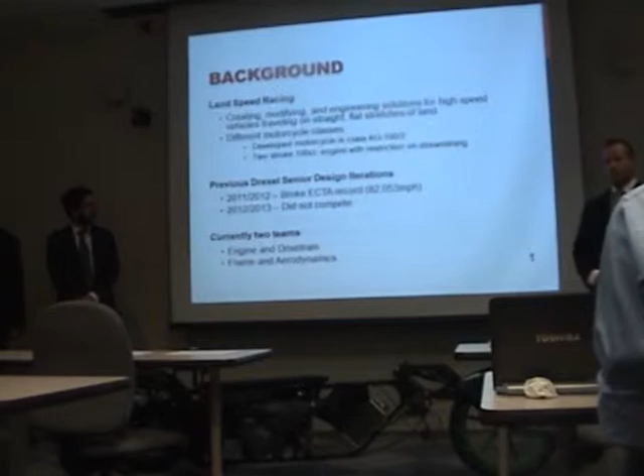A little bit of background about our project: it started two years ago by our advisor, Ryan Miller. He was trying to set the world record of 99 miles an hour. He went to ECTA in Ohio and broke the record there at 82 miles an hour. Last year they tried again but didn't get to race, so they couldn't try to break that.

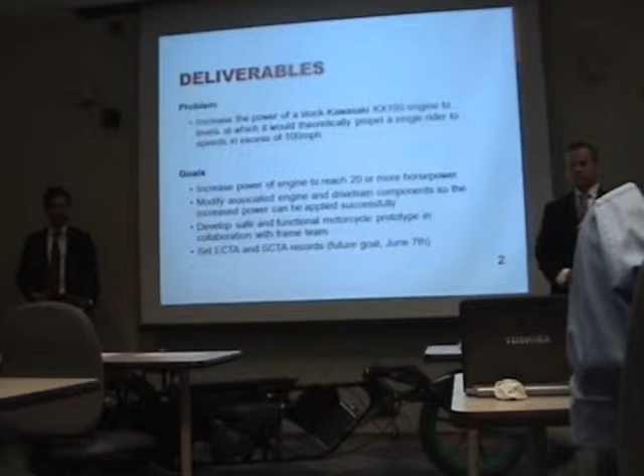Currently there are two teams, the engine team, us, and the frame team back there, working on this bike. The problem is we would like to develop the engine so it could theoretically propel a rider to 100 miles an hour, not necessarily beat the record, just make the engine capable of doing so.

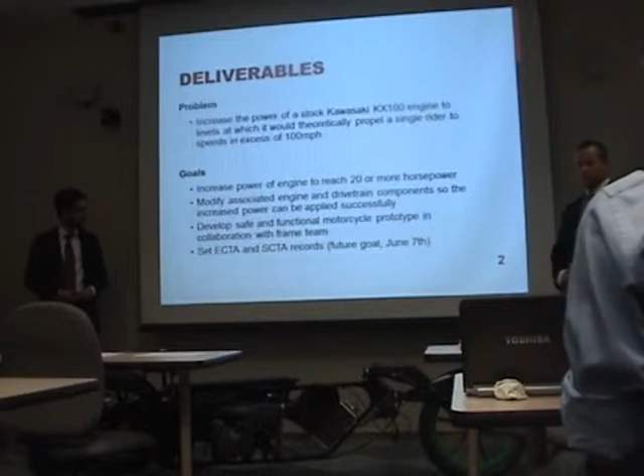We have some goals. First, try to reach 20 horsepower or more. Second, work with the frame team to develop this prototype to be functional and safe. And last, we want to try to set the record. That'll be in a month from now, I think.

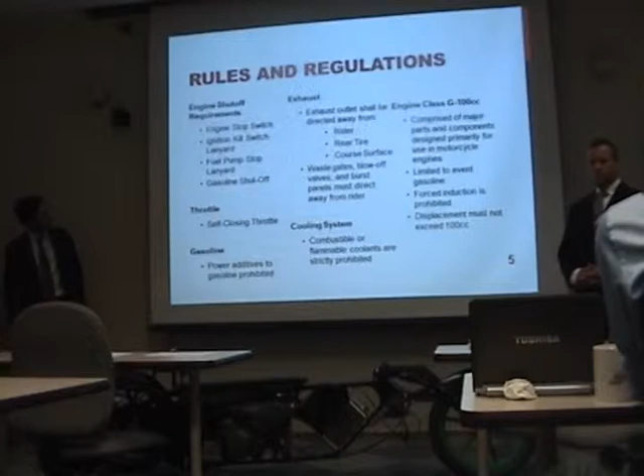These are the rules and regulations set out by SCTA and ECTA. We follow these while developing the bike to make sure Chris is safe as he's flying down the road. We've met all of these regulations, so we should be good to go when the time comes.

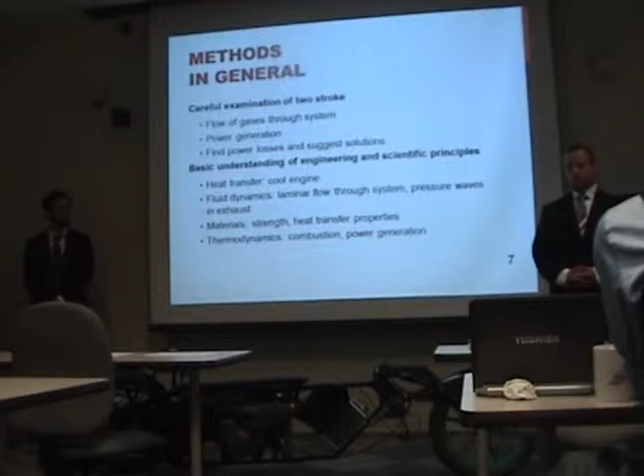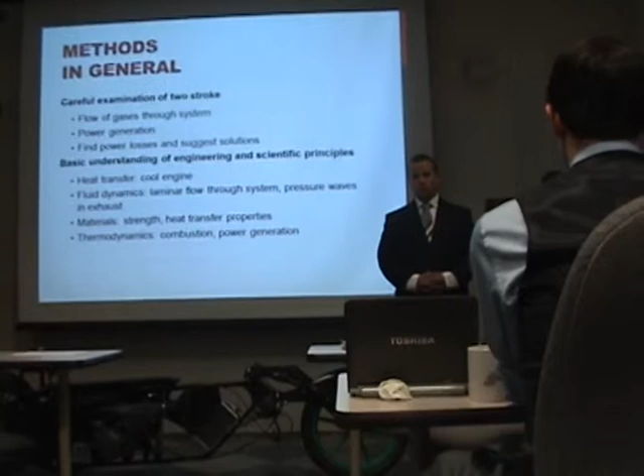The methods we needed to go over involved studying the flow of gases through our system, figuring out how to generate more power, and identifying where power was being lost. We used a basic understanding of our engineering classes at school, such as heat transfer, fluid dynamics, material strengths, and thermodynamics, to figure out these issues.

We began our project with a method of reverse engineering. We looked back at the past two years' teams to see what they had done with the actual engine.

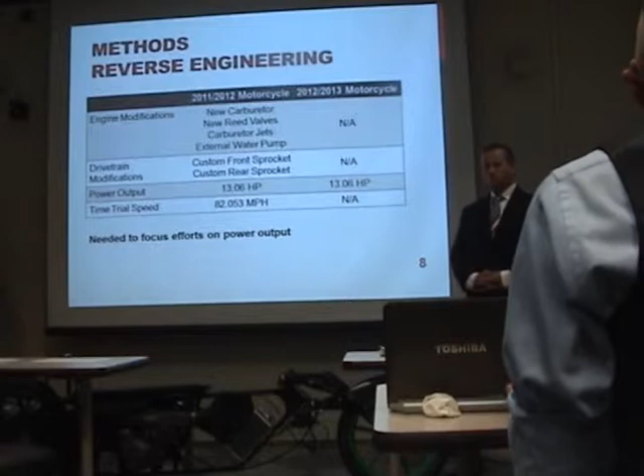The starting engine we received only had about 13.06 horsepower, and the only bike able to compete only achieved 82 miles an hour. Basically, the wind resistance overtook the power the engine was able to produce.

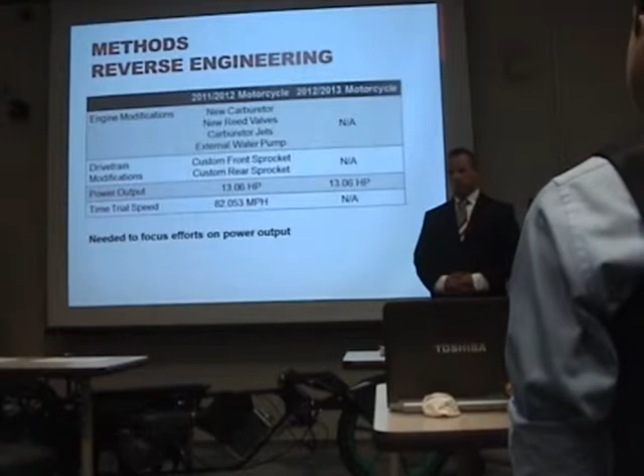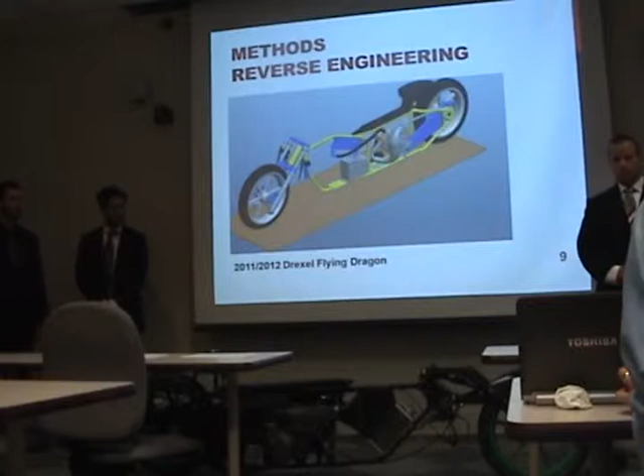We also looked at the designs of the frames from past years to see where the engine placement was, and whether the engine mounts were strong enough to hold the engine in place. We noticed that with the second year's bike, the engine wobbled around a lot, so a lot of power was lost and not transferred to the wheels.

So we had to work very closely with the frame team to create a good design for the engine to be securely mounted in the proper location.

Once we figured out a good frame design, we did a CFD analysis and determined we needed to achieve a minimum of 12 horsepower on concrete and 15.77 horsepower on the salt flats, due to the difference in rolling resistance between the two surfaces.

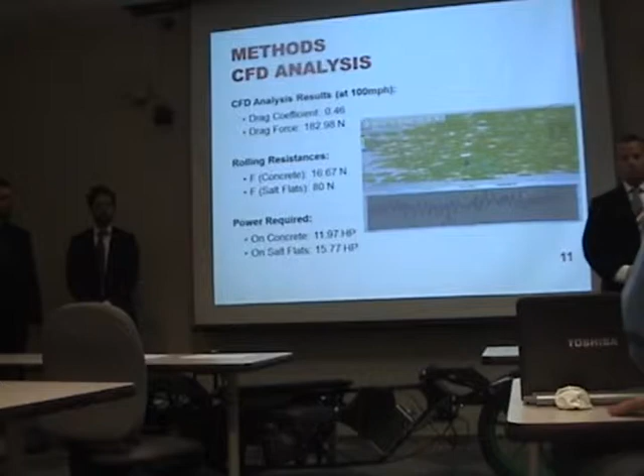Give me one second and I'll play a video for you of our final dyno run. Leave it going.

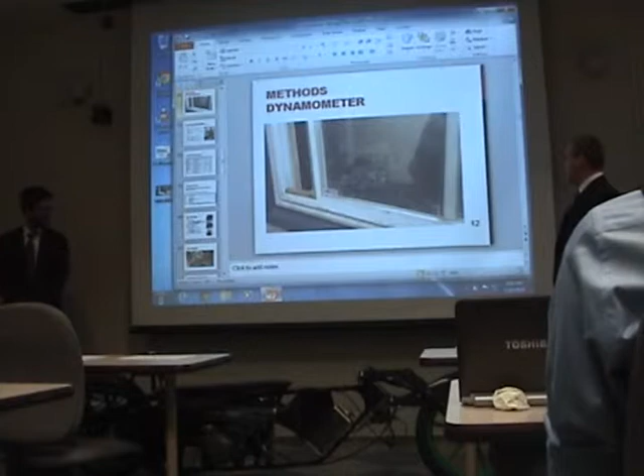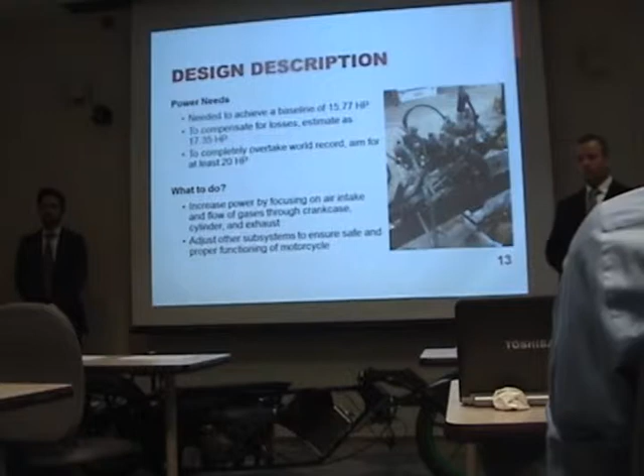Okay, so as we said earlier, we set our power goals. We need at least 15.77 horsepower. We factor in a safety margin of 10% to account for any losses we couldn't otherwise account for, so we need 17.35 horsepower to match the record. But we don't just want to match it, we want to beat it, so we're aiming for 20 horsepower.

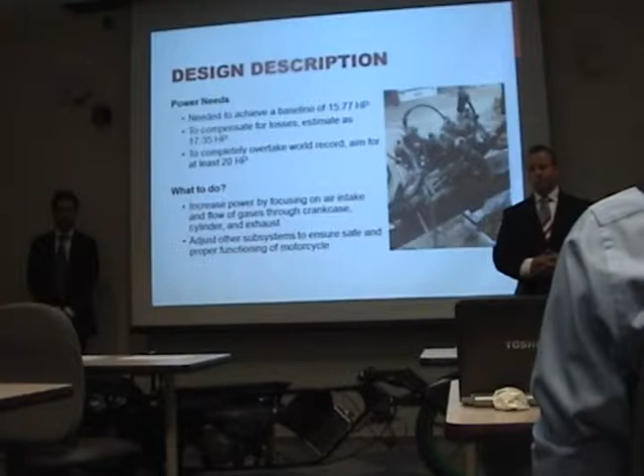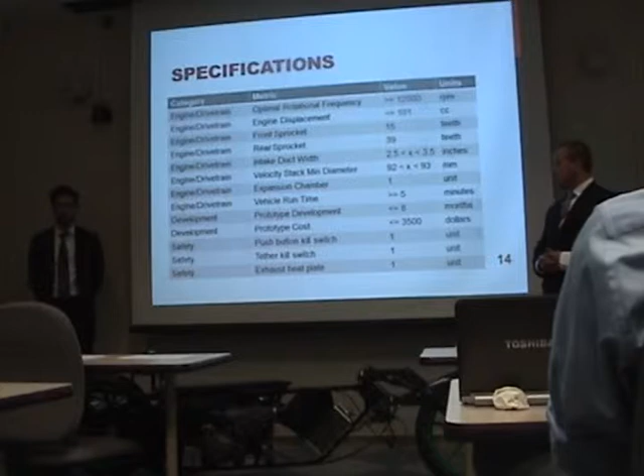Essentially, all we do to achieve that is increase the airflow of the engine. These are some of the specifications of the engine: we're aiming for 12,000 RPM, where our peak power is, and this shows our sprocket sizes. Anthony will go into detail later about how we calculated what's ideal for these situations.

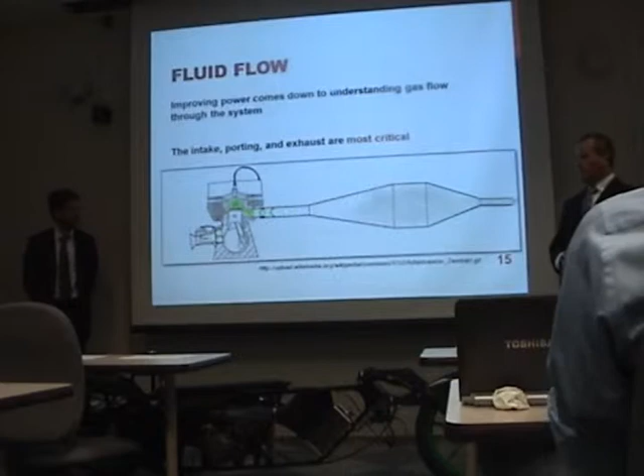Essentially, an engine is an air pump. The more air you can move in and out of the engine, the more fuel you can burn, hence the more power you can make. I'll also go into this diagram in more depth later.

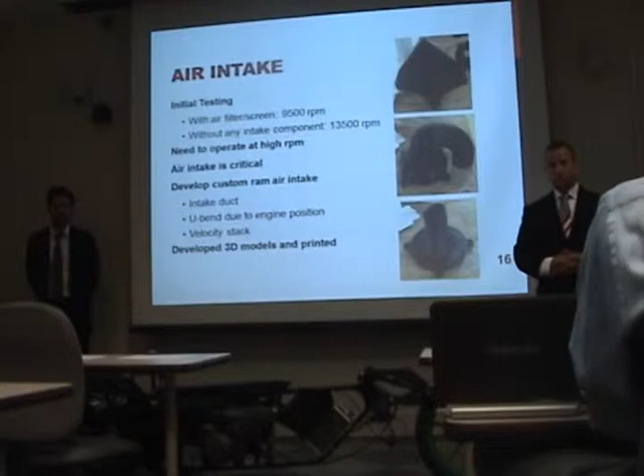So the beginning of the system is the air intake. Since we were in a class where we couldn't use forced induction by use of a turbo or supercharger, I decided to design a ram air induction system for the motorcycle, which basically takes the air as you're driving. The faster you drive, the more air that flows right into the intake.

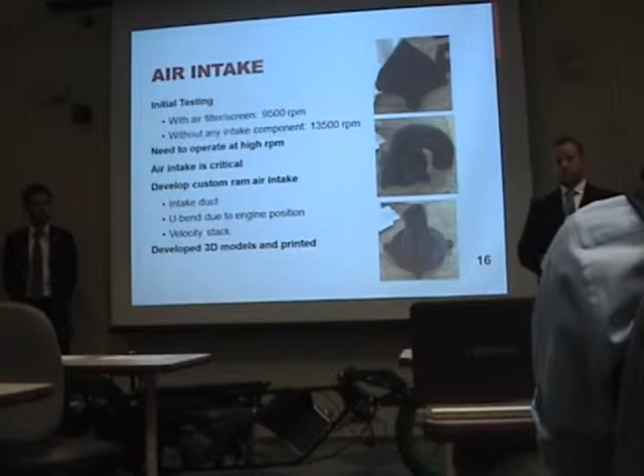But the only issue with this is you need to make sure that the air doesn't reach any type of sonic speeds within the system, because then it could cause a bottleneck and stop the engine and starve it. Also, you've got to make sure there's not too much restriction, because earlier the bike wouldn't rev past 9,500 RPMs because there was just a screen on it and it was too restrictive for the bike to rev out. So we needed to make sure this intake was streamlined, got all the flow that we needed, and made sure there was no restrictions.

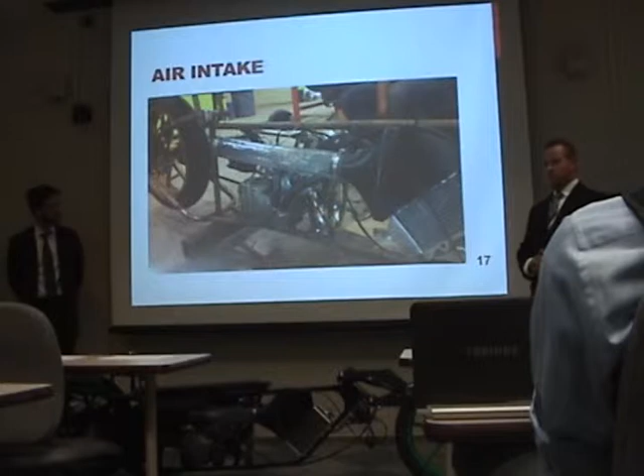Here's a picture of the intake on the screen, and you can actually see it right in front of you as well. It was created with 3D printed parts, and we did our proper heat shielding that we needed to make sure it didn't melt or cause any type of damage to the motorcycle.

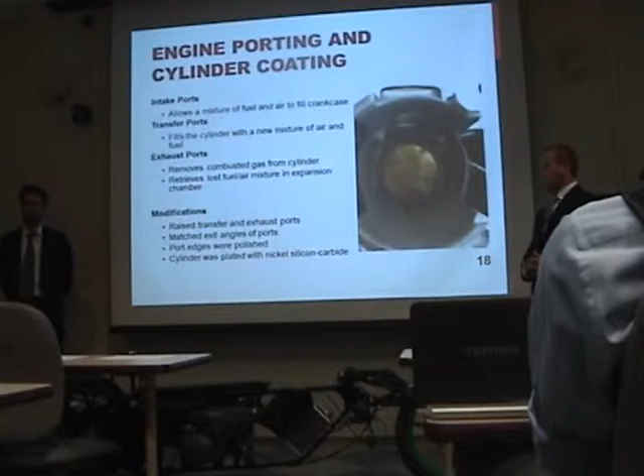Okay, so this is a picture down the bore of our cylinder, and what makes this different than your conventional four-stroke engine is that there are no valves. So as the piston moves up and down the cylinder, it uncovers and covers certain ports. By changing the shape and location of these ports, we can maximize our airflow and essentially change our engine timing.

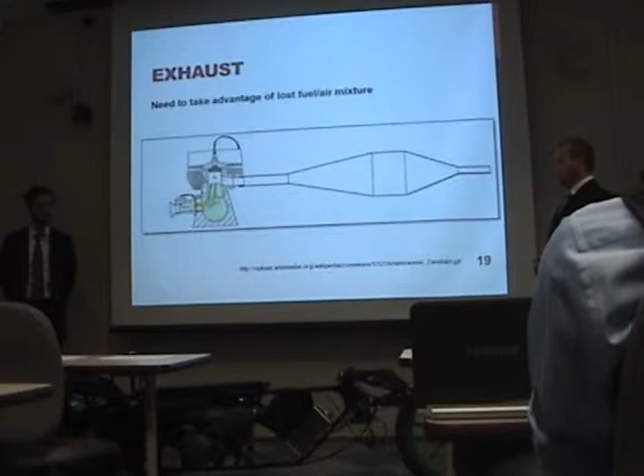This diagram is very important to the function of the two-stroke engine. It uses a tuned exhaust chamber, and the inherent flaw of the two-stroke engine is that you lose fresh intake gases out the exhaust while the piston is at bottom dead center. So to combat this, you use a tuned pipe, which actually reflects a sound wave back, which keeps that charge in the cylinder so it's ready to burn.

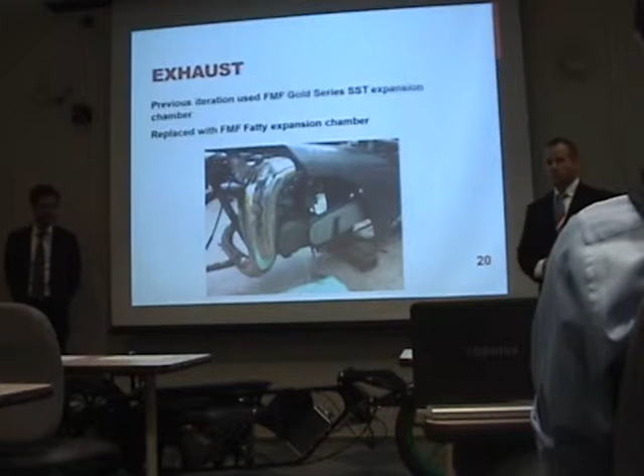This is the expansion chamber we ended up going with. We had another one from FMF, but what they do is change the size and shape of it to tune it for a specific RPM. And the fatty one was much better for our needs.

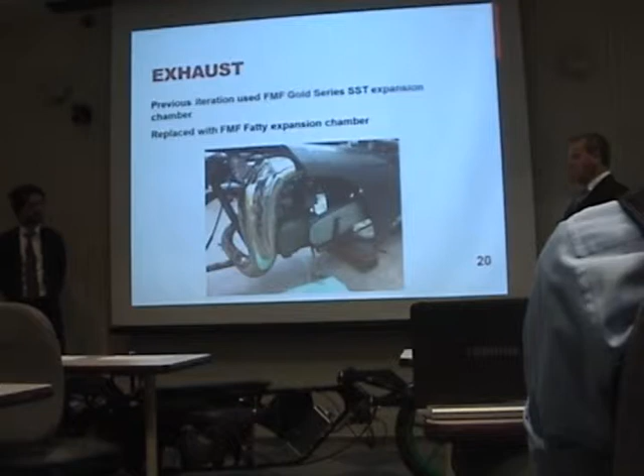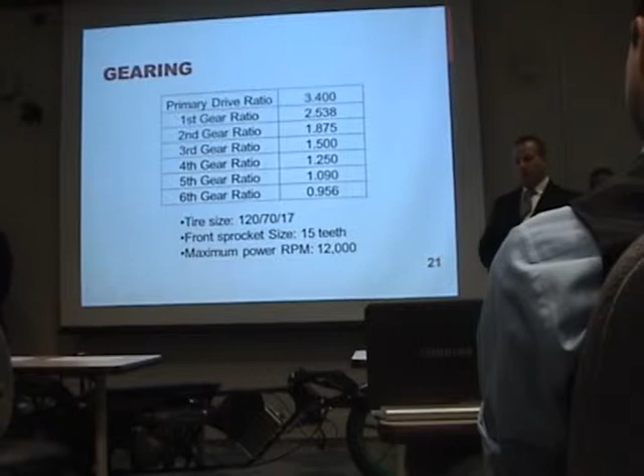So for the gearing, the first step was to take a look at the transmission and figure out exactly what type of ratio each gear had. Then our approach was to take a look at the sprockets, the rear sprocket and the front sprocket, and figure out how many teeth we would need in order to hit our target speed at our maximum power RPM, which is 12,000 RPM.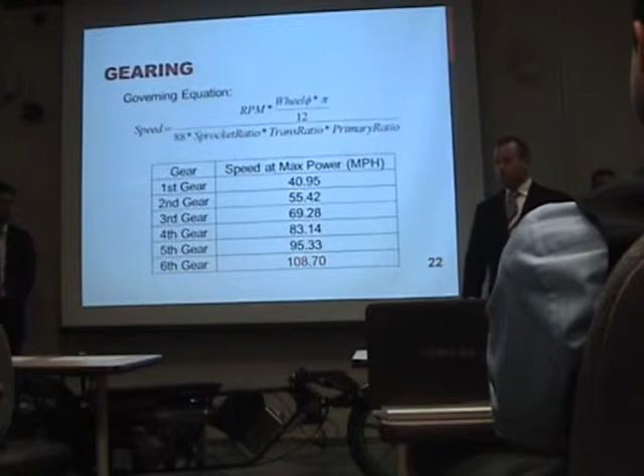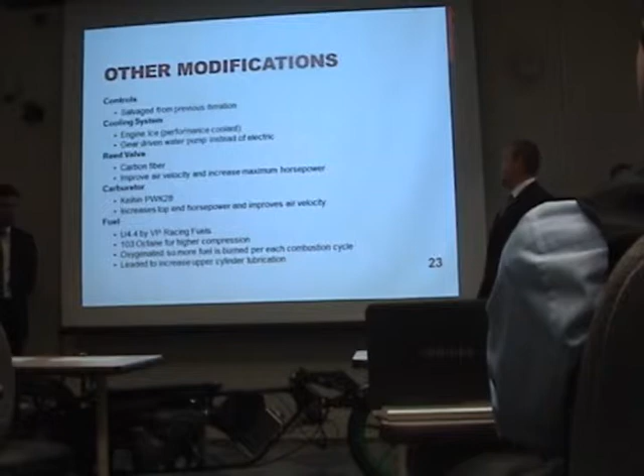So some other modifications we made: we were able to salvage our controls from one of the previous motorcycles, which was nice, so we didn't have to buy extra parts we didn't need. For the cooling system, we decided to go with Engine Ice. It's a very good coolant, widely used in two-strokes. Also, we decided to go with the gear-driven water pump instead of electric. It's just way more efficient.

Secondly, our reed valve - we went with carbon fiber, improved the air velocity, and it increased our maximum horsepower overall.

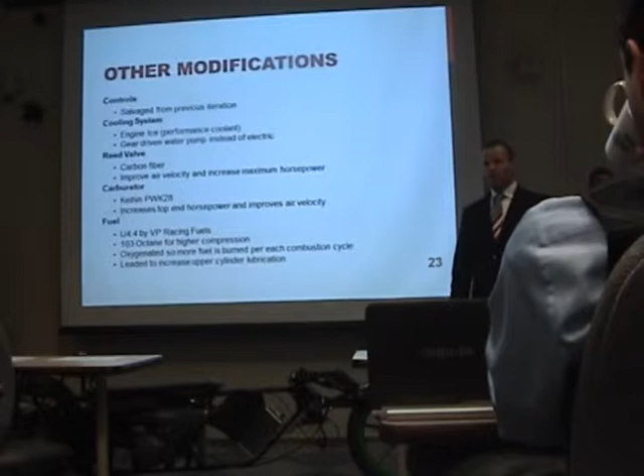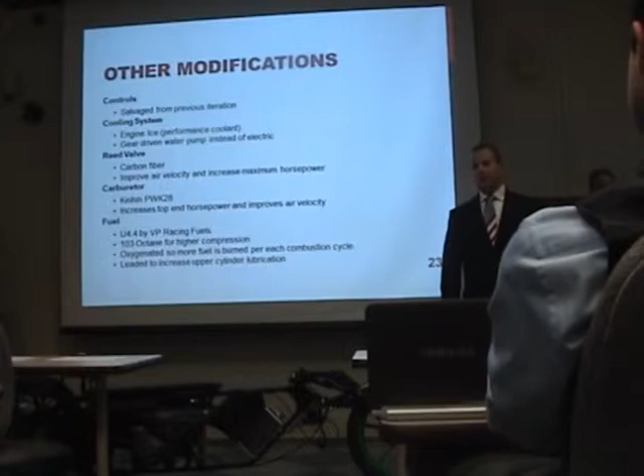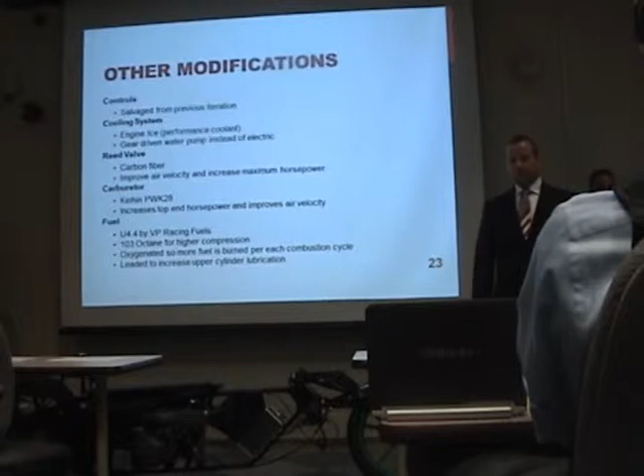Next, our carburetor - we decided to go with the PWK 28. The reason for this is it's a D-shaped carburetor, and what that means is there are basically three main different shapes: a D shape, a rectangular shape, and circular. The D shape is kind of like the best of both circular and rectangular, where we're going to be able to achieve maximum RPM power, regulate the fuel, as well as have enough torque down the low end to be able to propel us forward. So we decided it was just the best of all the options.

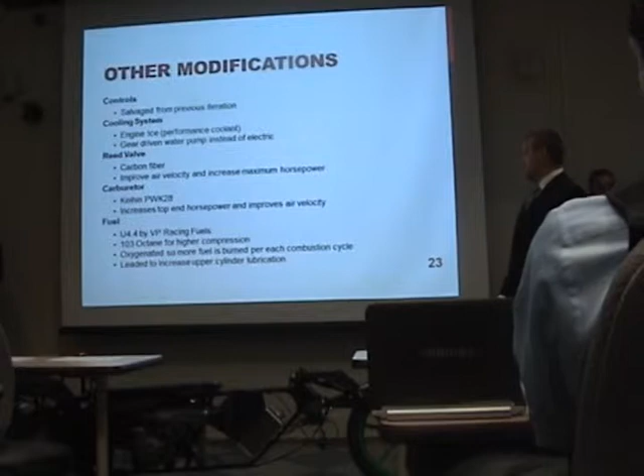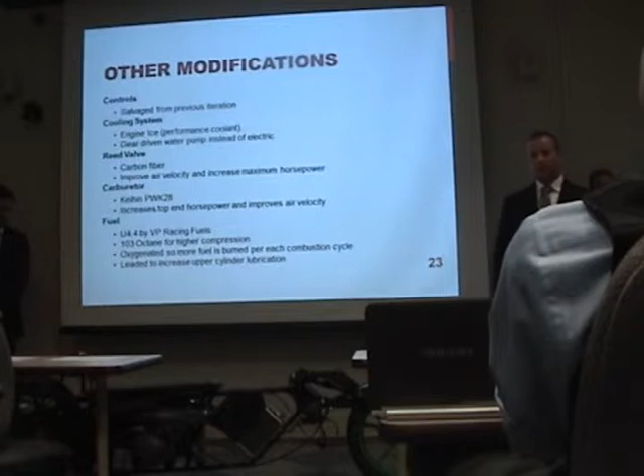Next is the fuel. Per our regulations given by ECTA and SCTA, we'll be using U4.4 racing fuel by VP Racing. This is 103 octane leaded fuel. It's pretty much the highest octane that we're allowed to run per regulations, and it's so far achieved our maximum power out of the different fuels we tested.

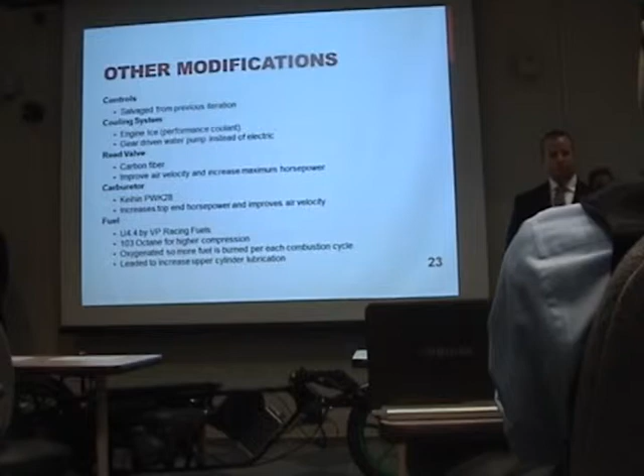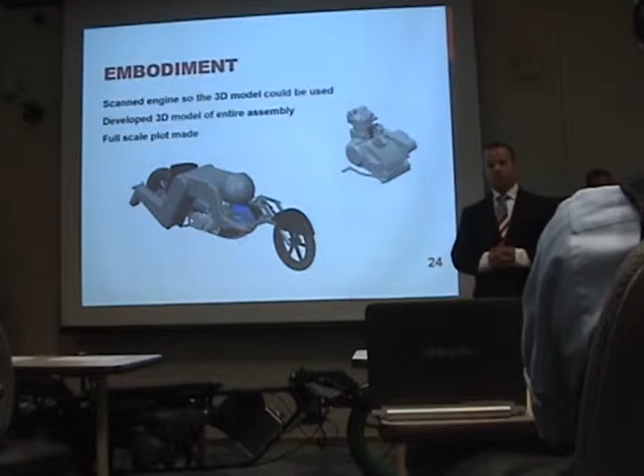For the embodiment, we did a lot of 3D modeling to collaborate with the other team, mainly using SolidWorks. Once we had our frame designed, we took the motor and utilized the 3D scanner down in the UG lab. We took a scan of it, placed it into the frame to make sure everything fit, so that when we started routing our exhaust, intake, and everything else, we knew there wouldn't be any issues when it came to putting everything together.

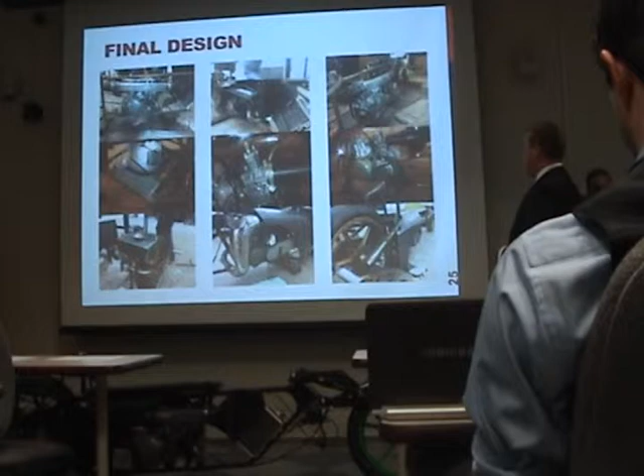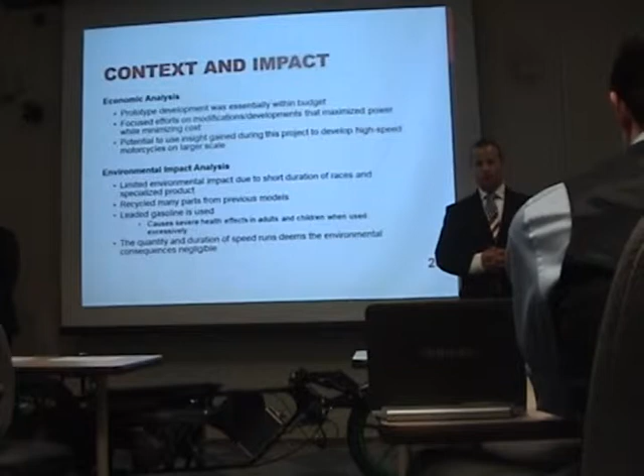For our context and impact, first is economic. We developed a prototype within our budget. Luckily, we didn't spend too much money on our motor. We were able to outsource a lot of it and have a lot of our work donated. We had free dyno pulls, and our porting work done for free, just helping out our sponsors by getting their name out there, putting stickers on the bike.

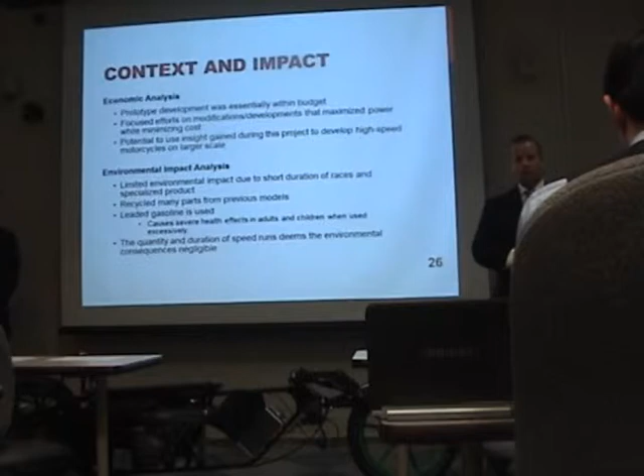As far as environmental impact, we are using leaded fuel, which in theory is harmful to the environment. However, this is completely negligible in this case because there are so few emissions from doing a run on this motorcycle that it just doesn't affect the environment negatively very much.

For social impact, we're trying to increase overall attention for land speed racing as a sport, get people more interested in motorcycles in general, and also get students involved in STEM projects. Something interesting like this, we could definitely see convincing high school students to get into engineering or any type of STEM related field of study.

For ethics, we were adhering to our safety regulations to make sure Chris is going to be absolutely safe while riding this motorcycle. We didn't overshoot too much, like going for 140 miles per hour, because that's just a little too much for this frame.

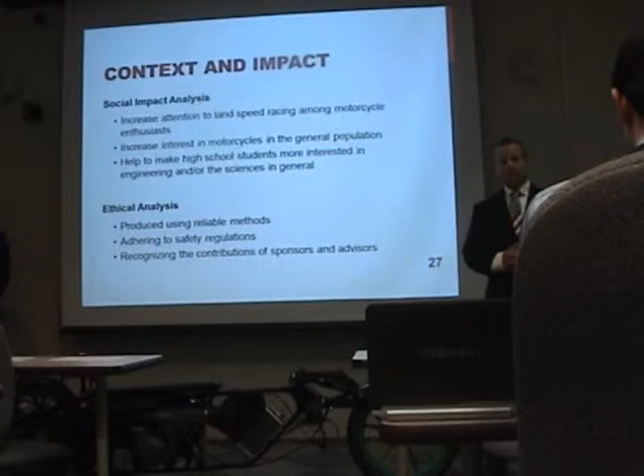As for safety considerations, myself being the rider, it's pretty important to me. I'll be wearing a full suit, as well as a full face helmet, gauntlet gloves, all that.

As far as the motorcycle, there are certain safety factors we have to consider, such as a chain guard, so in case there's a break in the chain, it's contained. It protects the motor, and it protects myself as the rider. There's a great deal of heat, and since I'm straddling this, it needs to be confined or directed elsewhere, so there are heat shields. They also act as guards to protect my legs from other things that might come flying apart. In general, safety is about protecting myself, as well as protecting the motor in case of other failures.

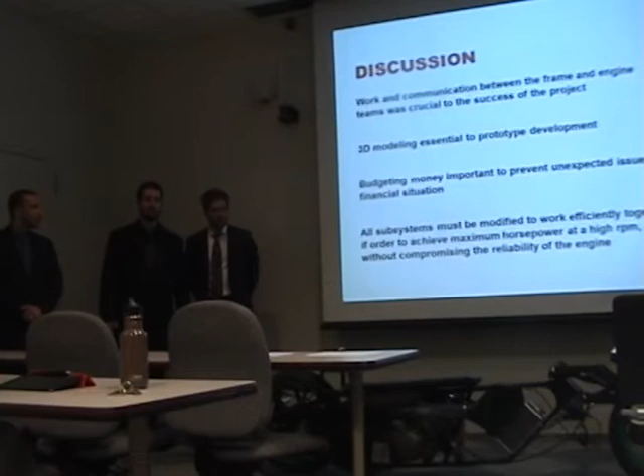For the two teams, it's crucial to communicate with each other between the frame and the motor. We need to be developing at the same time as far as locations, placements, and mounting, and there's a great deal of communication that needs to go on between the two teams. We achieve that through our 3D modeling and a lot of collaboration. There's also a great deal of budgeting that has to be done between the two teams, since we share the same funding, so that has to be taken into consideration, as one team can't have all the money. Then all the subsystems must work together when finally designed, coming together as a full working prototype.

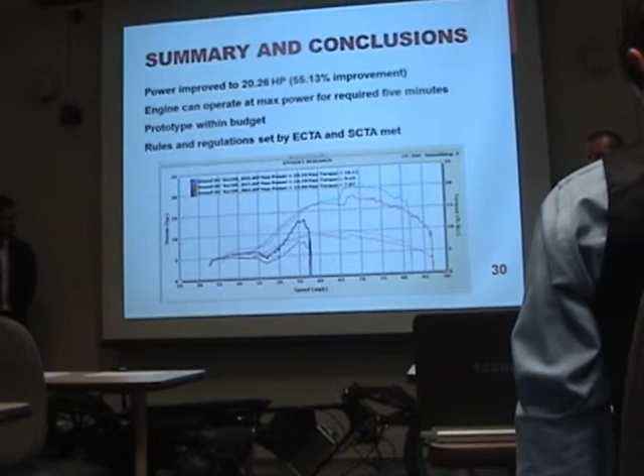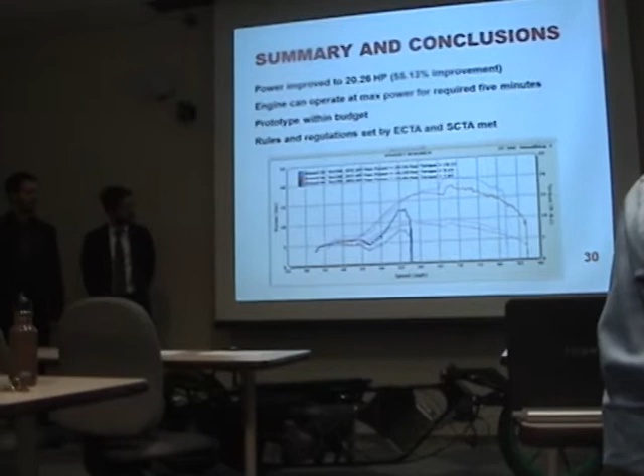This here is our dyno graph showing the initial dyno from when we got the motor from the first and second team's condition, which is the shortest line there. This is the first one at 13 horsepower from the original team. This is after we had the motor running properly, our final achieved horsepower and torque at 20.26 horsepower and 10.11 torque. So we achieved our goal, a 55% increase in horsepower from when we initially received the motor.

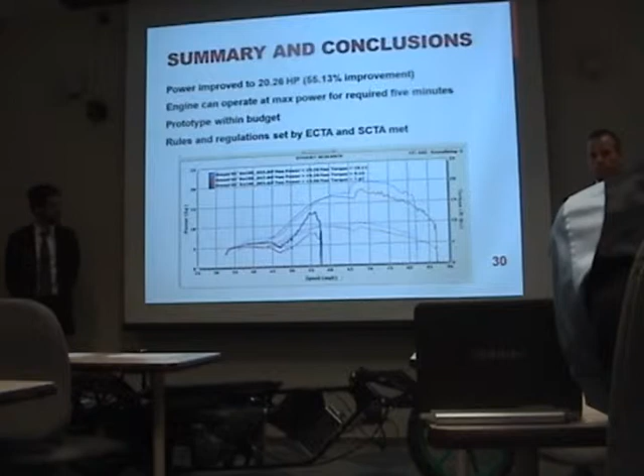So we are at 100% of budget and hit all our goals, and we are within regulations and tech and all that. So we will be competing with this motorcycle.

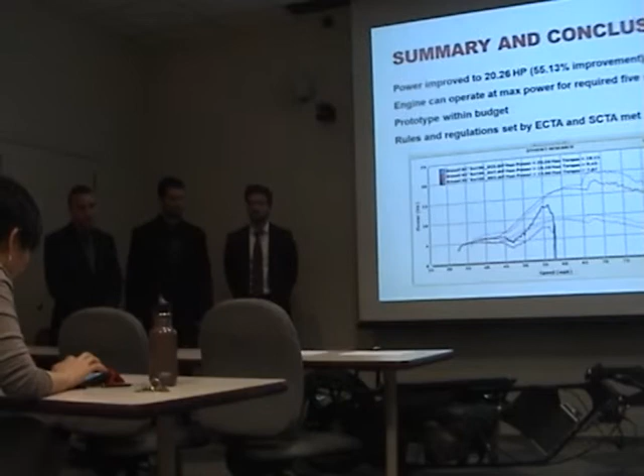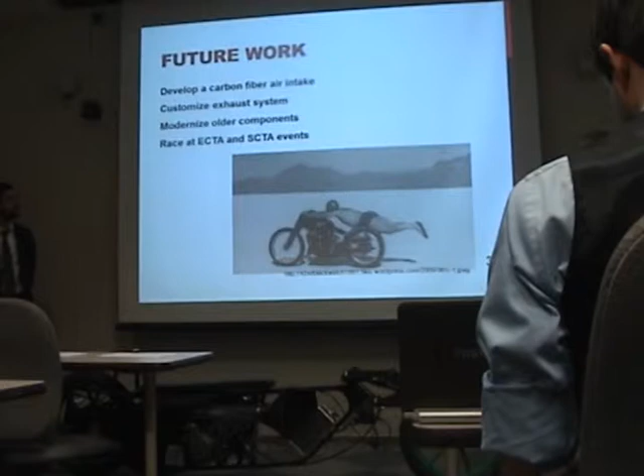Future work includes developing a carbon fiber intake to be lighter, smoother on the inside, with better flow, and a custom exhaust. As we said, we chose a pre-made expansion chamber, since custom making one does have advantages, like tuning to a more specific RPM, but given the limitations we had to produce this project to where it is now, we went with a stock pipe.

Other future work includes revamping some components, such as kill switches and other parts used on previous models of the bike, and of course, competing with this motorcycle.

As far as team management, there was very much communication between the two teams as we needed to work hand in hand the entire project. We used Liquid Planner, Google Drive, and Google Hangouts for team meetings. Ant was team leader in the fall term, and then Josh took over winter and spring terms. Anthony handled finances.

Originally we had subsystems divided up between team members, but that all kind of mushed together as we started to work through the project. We all worked together throughout, and there was much collaboration between the two teams.